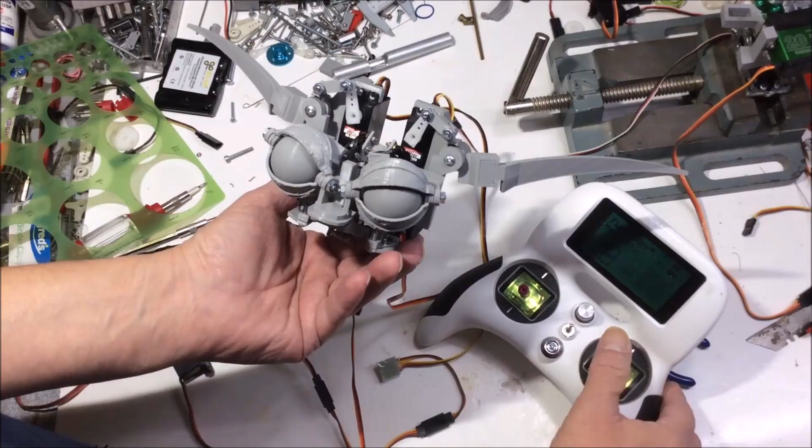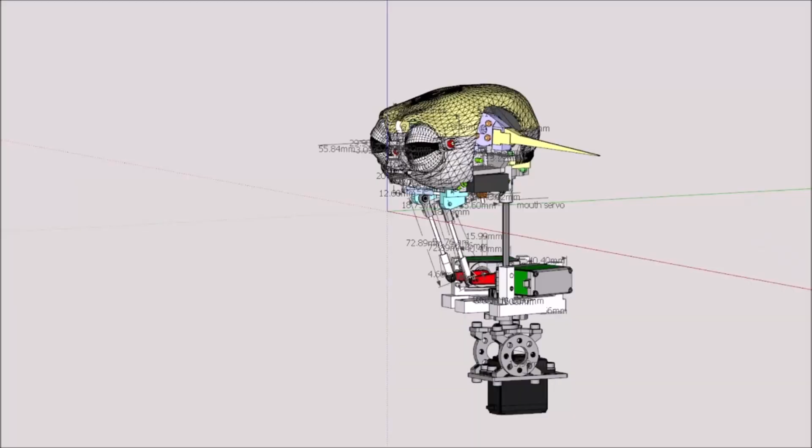Well, I'm hoping to start doing a little animatronic so we can do one together, and we'll have something for y'all to test and understand how this goes and how it works, and probably do some servo reviews. Also do some,

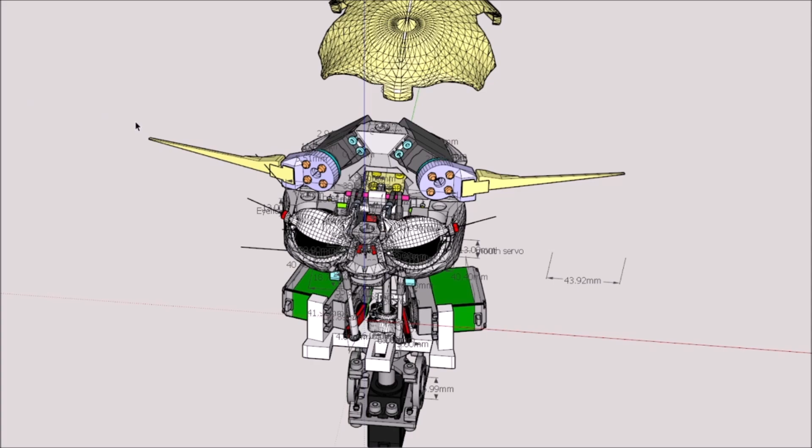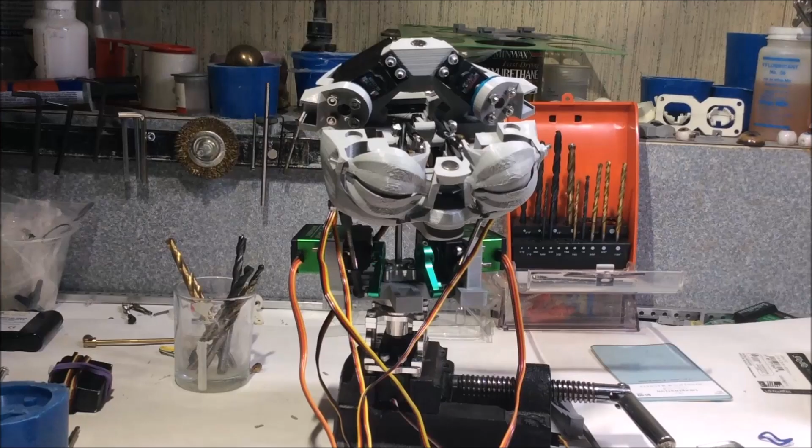Mainly I like getting micro servos because the goal is to get a skin on this animatronic, and the animatronic needs to be small because a lot of people don't have an extremely large resin printer, and we're going to need a resin printer to make the skin because it's highly detailed, so we can do the skin. And as far as the core, it can be done with the FDM printer.

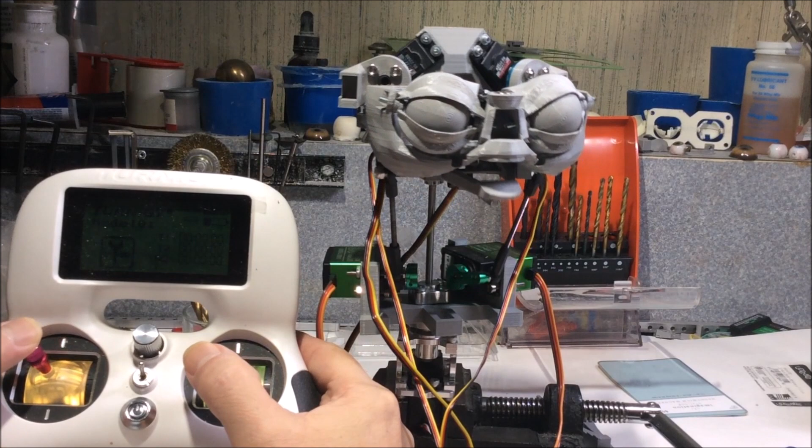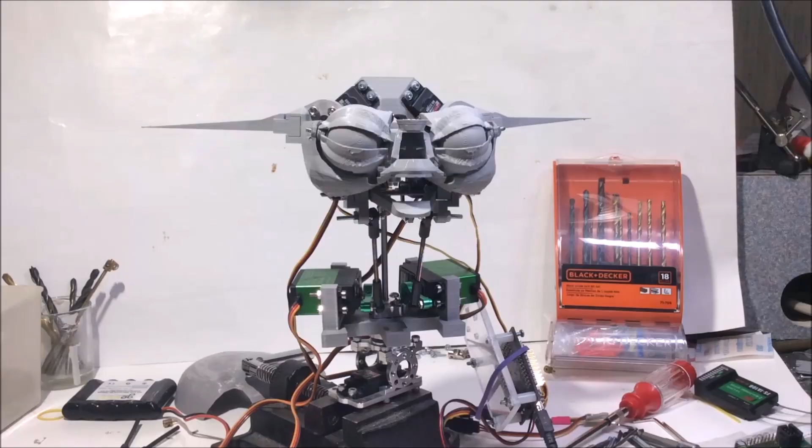But once again, when you make a silicone mold, and you mold anything that is a resin print, there are some problems with the silicone reacting to the resin print, and there's certain things that you have to do to prep this resin print so we can get this molded.

But we've got to keep it small once again because the build platforms of resin printers only go up so high, and not everybody can afford some big industrial resin printer. Well, what you've been seeing is a lot of my older work, a bunch of Grogus and things like that. But eventually I want to get y'all introduced to software so y'all can program these things.

But you will need a radio, an RC radio.

I've been using VSA software since 2004. And it's really easy. I mean, this whole little routine with just 4 servos just took me like 20 minutes to make. You can also add sound to it.

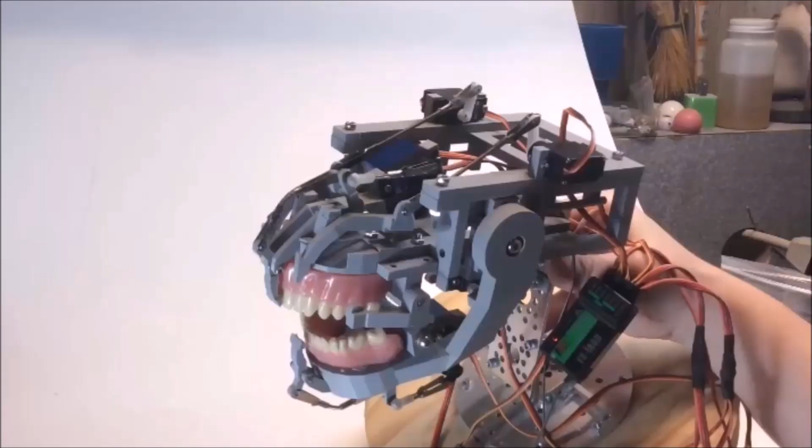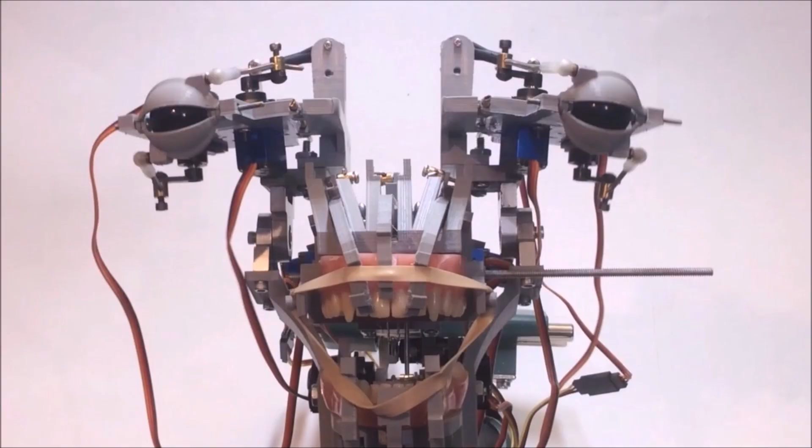I've done a lot of testing on these animatronics, design and tinkering with certain types of movements, just my obsession with 3D printed animatronics, digital, changing the whole old school method in reverse to where you design the animatronic first and make a so-called life cast, and instead of a life cast of an actor or actress, you make a life cast of the animatronic, and then you can put the skin on.

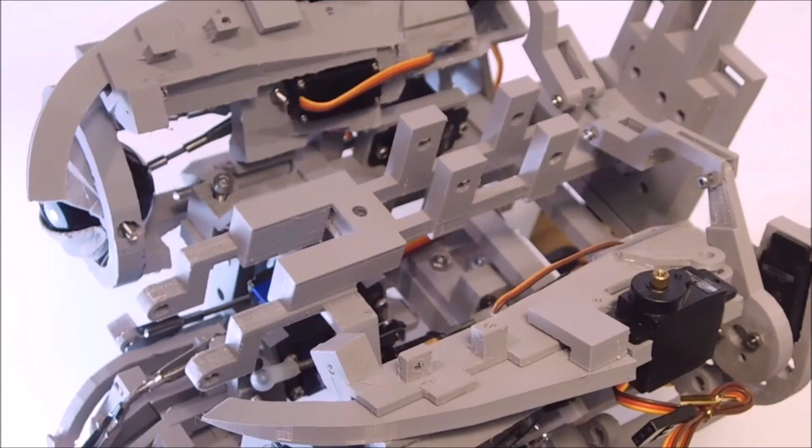And this is me having an obsession with animatronics, and I've been doing this for several years, and it's a passion, and I just want to see creatures move.

Working on this animatronic, trying to get the lips to move, and using these wires and housing, trying to get them to move just a few millimeters to give it some kind of realistic movement. And you can see where I can have even the jaw have just a little bit of give to it to give it kind of protrusive jaw movement, and every little tick gives a little bit of a different kind of expression. But it's getting there. It's just always testing.

You have a lot of RC stuff, hobby, you know, it's a multi-billion-dollar industry. You have boats, planes, cars, you name it. How about creatures?

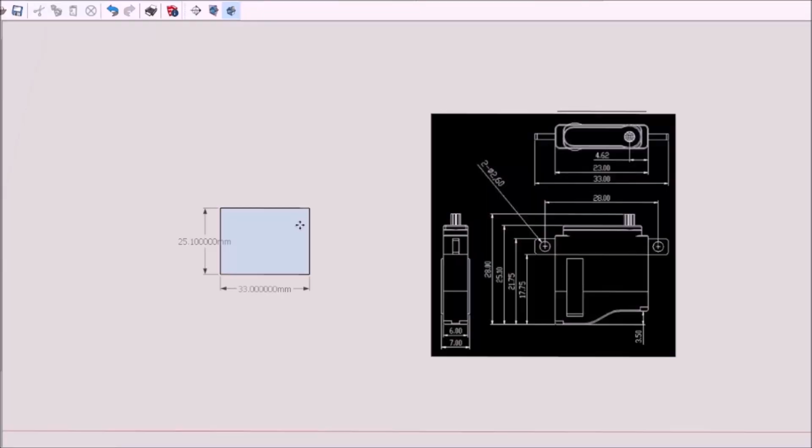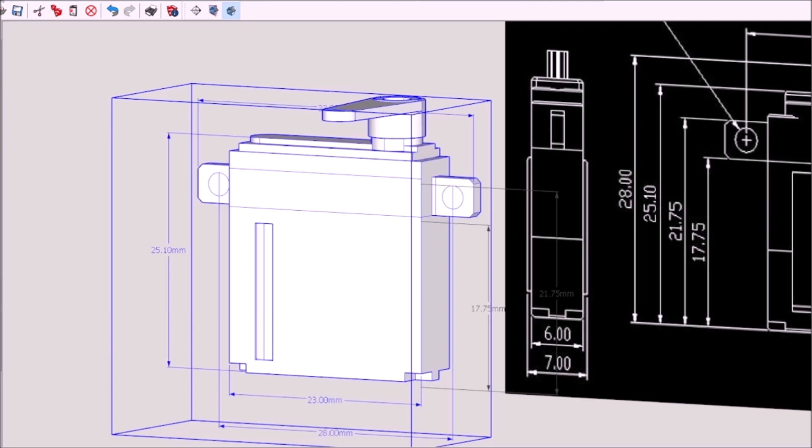Basically, when I design an animatronic, after doing the research of servos, and like this is a wing servo, and it's small and flat, and it will save space. So I'll draw it out from the schematic of the servo, and most servos have a schematic of their size and dimensions. So I draw it out so I can place it in my designs and just manipulate it, see if I can do this or that. But basically, this is what I do 90% of the time.

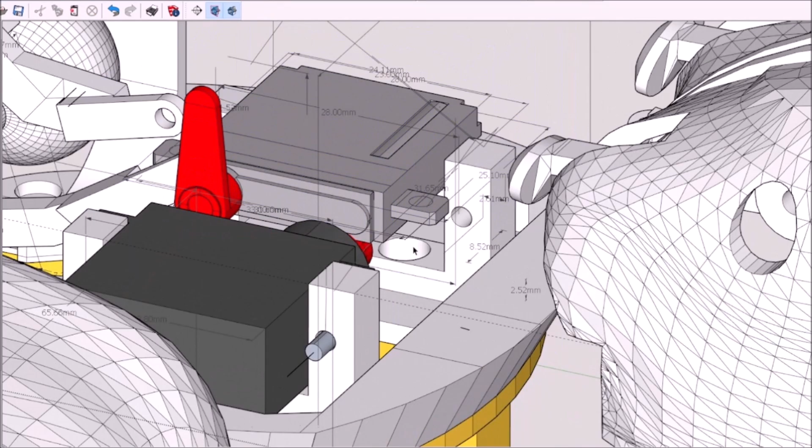In designing these animatronics, you find little things that you can do, and I'm using SketchUp 2017, and it's free. I know people use other software like Fusion 360, but I just never could get into it. But I use Blender and things.

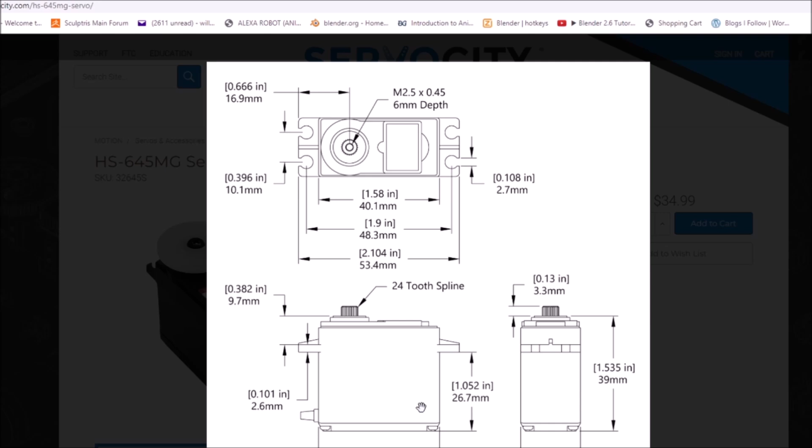But this right here, if you keep all your servos the same servo, and if they're small, you can enlarge it to the next size servo, and that way you can enlarge the animatronic. There will still be some little things to manipulate, like the screw points; sometimes the screw points are 4 instead of 2, but it's pretty neat that you can make one bigger.

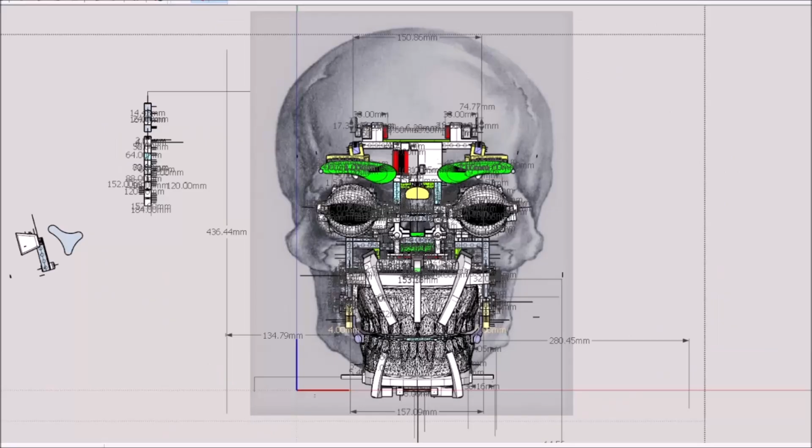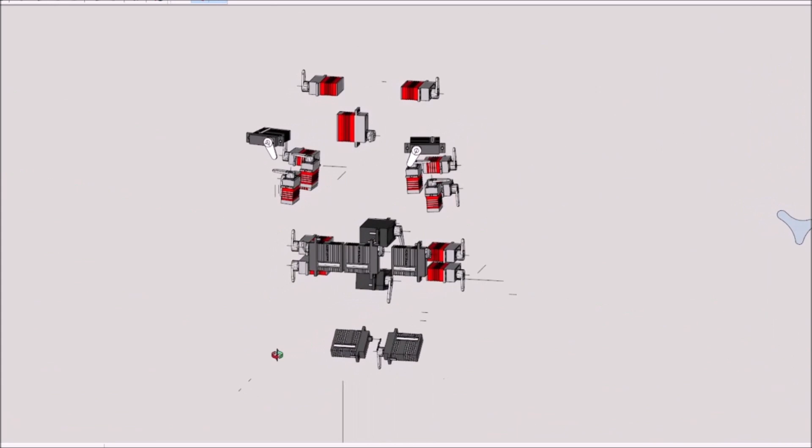I've been working on this for over a year. This is a 26 servo animatronic, and I worked on it some today, and I'm going to show you some of the stuff I've been working on. You've probably seen most of these videos, but there's a lot of servos. There's a lot of work too, because you got to keep taking it apart and putting it together. You just got to keep testing.

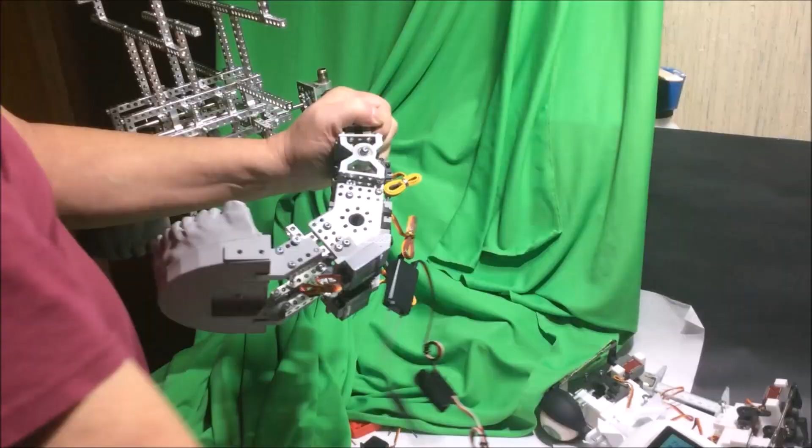This is a large animatronic head I'm designing. It's going to have 26 servos in it. I'm doing some testing on the eye mech and the jaw. This jaw is probably strong enough to bite an apple, but it's going to have protrusive jaw movement, and these linear rails here are just going to make it slide back and forth, give it more expression.

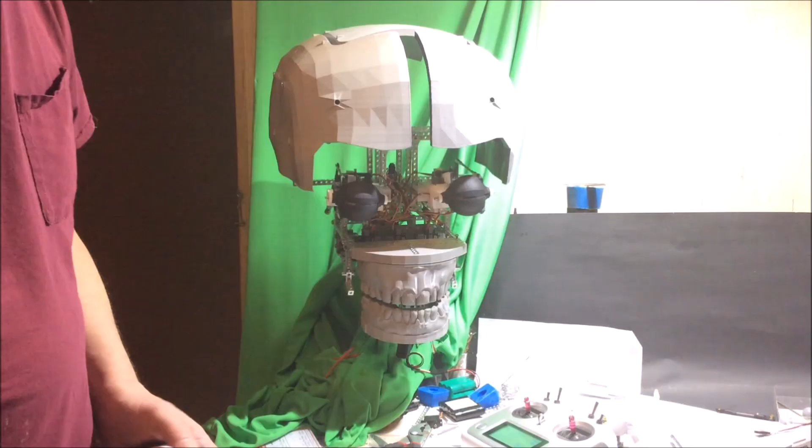It's going to have some lip movements, so 3 on the upper lip, and 1 on the bottom, and tongue, but I'm getting there and putting the skull on, just doing some design work to see where I need to make adjustments. But just some testing the eyes and the jaw. But it's getting there. It's a big boy.

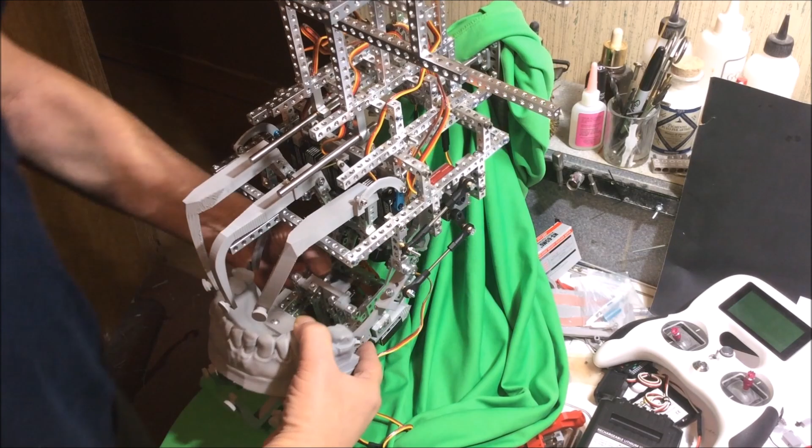This here, I'm putting together the lip control, or the lip paddles. I usually use cables to pull, but I went with these, being silicone, I can just have a socket to put the lip into the silicone when that's developed. And this has protrusive jaw movement also, and I'm putting in the rods into the linear bearings, and it's coming along. It's a big boy, but it's coming along.

This is the smile movement, where it smiles or frowns, the corners of the lip movement, since it has a very large mouth. It could eat an entire apple, a big one. And this is the three upper lips. And the lower lip is one solid because you don't move the center lip. The center lip, you don't control that unless you pucker or whistle.

The aluminum beams are threaded on each end, but the other ones are just straight through every 8 millimeters. It's a good way. They're lightweight, and I keep taking it apart and putting it together. I want it to be durable, and this would be the best way because plastic will break.